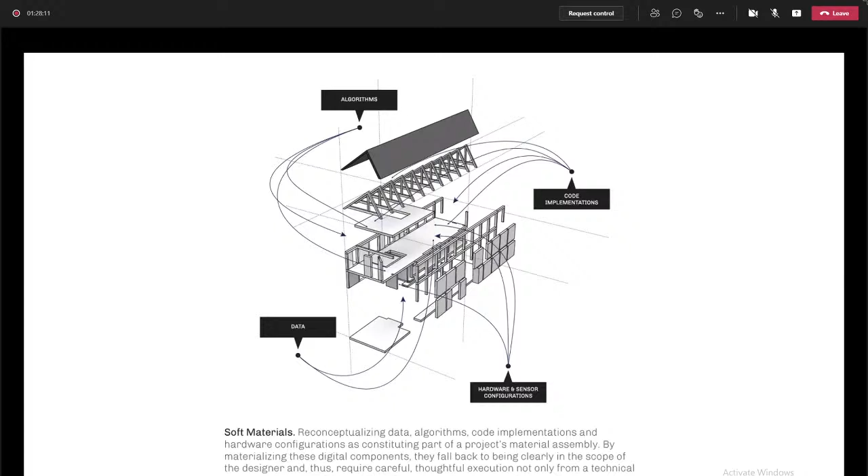And so what does this persistent agency mean for architects' relationship to these embedded computational components? For one, I think it's really important to note that they're no longer design tools, which is often how we think about digital technology within architecture. They're not tools that help with work done while in studio or in a fabrication shop, but rather, more like materials, they directly shape the ongoing impacts, experience, and performance of the project.

So as such, I argue that these software embedded elements, such as data, algorithms, code implementations, should not be decoupled through a perceived immateriality from a project's physical dimension. And instead, they should be thought of as soft materials, which is a term I use to describe and foreground these things, such as data, algorithms, and code implementations, as materials in and of themselves, and thus explicitly constituting part of the project's material assembly.

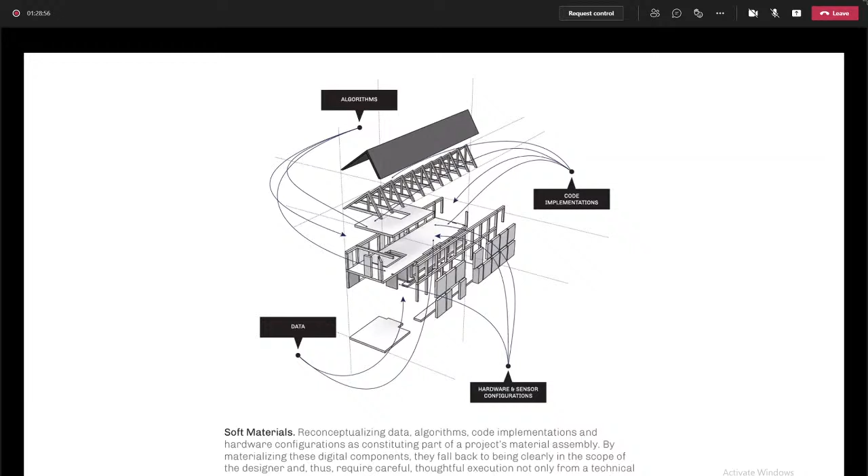I'm sorry, those are my kids, I'm sorry for that.

What I'm trying to get at is there's a material-oriented perspective of digital media that operates in worlds of media theory and science and technology studies and things like that, that really reinforces the idea of this soft material reconceptualization. And so these three texts, quite recently published, all help support that, and I'll just quickly talk a little bit about them.

So The Stuff of Bits by Paul Dourish is really exciting because it focuses on expanding our conception of digital media into assemblages of hardware, software, data representation, spatial practices, computer languages, and other related items. And so Dourish is really fascinated with how formats and representation constrain, enable, limit, and shape the ways we can engage and use media, digital media specifically. So an example would be, think about how different your architecture project would look if you designed it in Excel rather than AutoCAD. So the format of the tool shapes the outcome.

The second one, All Data Are Local, by Yanni Loukissas, is also pretty interesting, where he calls for new models of very explicitly local practice with data as a way to form close relationships with not only data, but also the conditions in which the data are manifest. So he's really actively trying to connect data to place. He recognizes that data are cultural artifacts affected by numerous factors, including the people that create them, the time and place they were created, the audience which they were created for, and the instruments and machines used to create them and consume them.

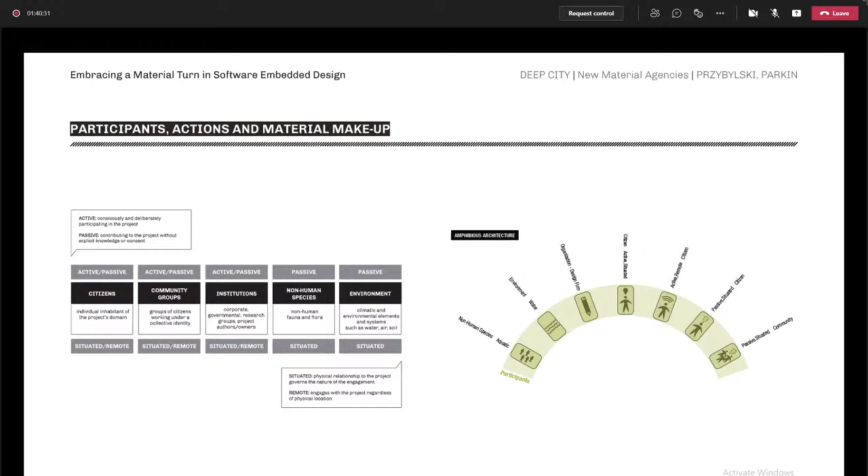You'll notice in the slide on the left side non-human actors, including the fish, all the way through a whole bunch of human actors, including the designers. The water becomes an actor. The emphasis is to really be inclusive of who's considered as being impacted as a stakeholder in the project.

So moving along, of course, these actors do things. The framework organizes 9 types of actions along a get-set spectrum. The get actions deal with the lower level interactions, so use cases and scenarios primarily defined by accessing or retrieving project amenities. Looking at the lights to get some information is an example of that. And set actions see participants assign and manipulate project states, so that's a much more empowered state of participation.

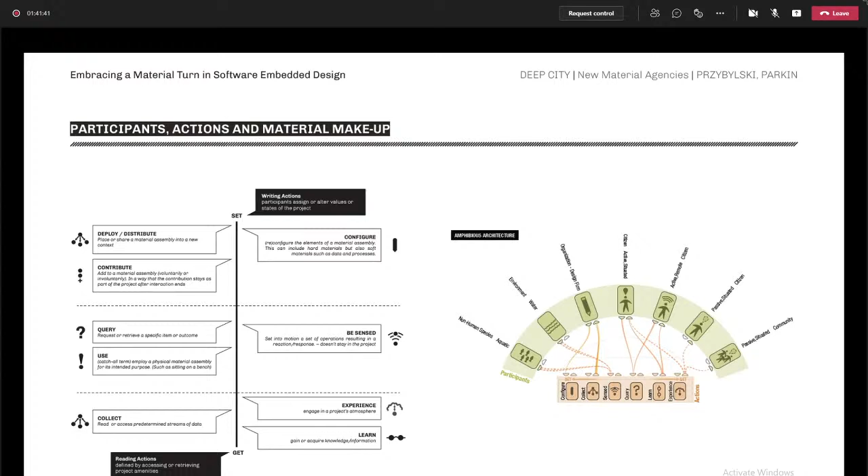And as you see this diagram unfolding on the right-hand side, we expand the diagram for that project by enumerating available actions and linking them to appropriate participants. So the fish can be sensed. That's pretty much all they can do. But an active situated citizen can interact with a few different details that I didn't go into, like they can text the fish if they wanted to, which creates a response in the light.

And so the end of the first stage is concluded with this addition of a material makeup, which is the lower arc of this drawing, where we start to, for all these projects that we're studying, really enumerate the material composition and organize it into three categories. So soft materials: data streams, databases, algorithms, and code implementations, things like that. At the other end, there's hard materials, so all the physical materials that we're typically thinking about in projects.

And then in the middle, there's something we call SED-ware, or software embedded design ware. These are physical elements that are directly supporting soft materials and often acting as links between the real and virtual worlds, including items such as sensors, actuators, microcontrollers, and conduits. Even just this act of enumerating these things that often get black boxed in these architectural implementations of software embedded design is a big step. But then we also start to trace them and connect them and really show their agency in the impact of the project as it relates to the spectrum of actions that are available.

There's a second part to it, that is a bit newer still, but it's starting to assess what we find in that first part, and it leverages that information into a reflection on starting to project wide-ranging values and outcomes, both planned and unplanned, that we want to bring into the focus. And so we want to engage these projects in terms of rights and security, participation and experience, equity and access. And we do an analysis on where we think the projects are strong or increasing in their capacity, and where these projects are maybe taking things away from the family of actors.

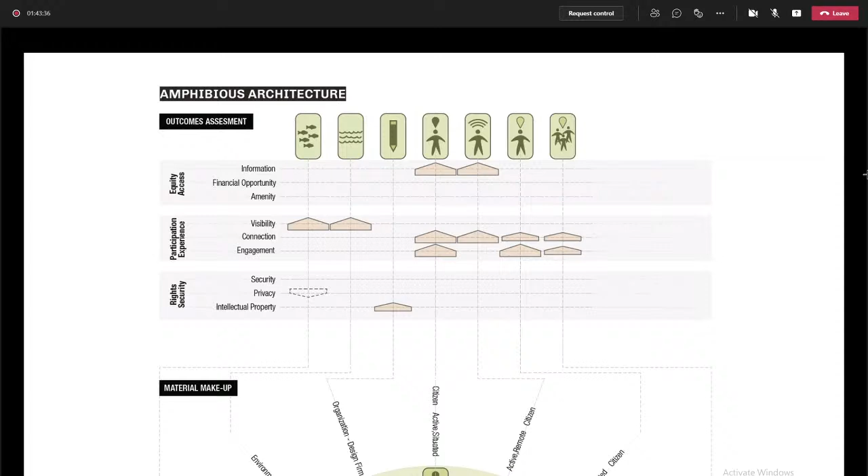And so I know that's a lot to take in, but this is the takeaway. The framework doesn't allow you to just study one project, but because of the standardized framework-like approach, you're enabled to read across projects. And very quickly through the visualization strategies and the organization, you can really read different degrees of agencies of material entanglements, as we like to call them, and the outcomes that the project makes. So there's a power to thinking about and normalizing the analysis in this way.

And so zooming this back out a little bit and maybe offering a way to get back into it during the discussion, I really see these software embedded design projects as actively moving from test beds, which is where they have been. And of course, with the impetus of 5G and smart city moves and all that stuff, these things are rapidly pushing out to be real world deployments. And so we need to support engagements that maintain a connection to the complex urban condition in which these projects operate, and not be blinded by their tech focusedness.

And I think the materialist account of embedding computational components can really serve as a way to complement the performance-oriented engagements with software embedded design that are often very important and unfortunately, in my opinion, dominate the way we talk about them. This approach exposes an alternative, harder to measure perspective centered on social and ethical impacts and outcomes. So that's the intent of the project, to really just offer a different lens to explore this work in parallel to the ones that are already being celebrated and published in traditional architectural avenues. So I think I'll stop there.

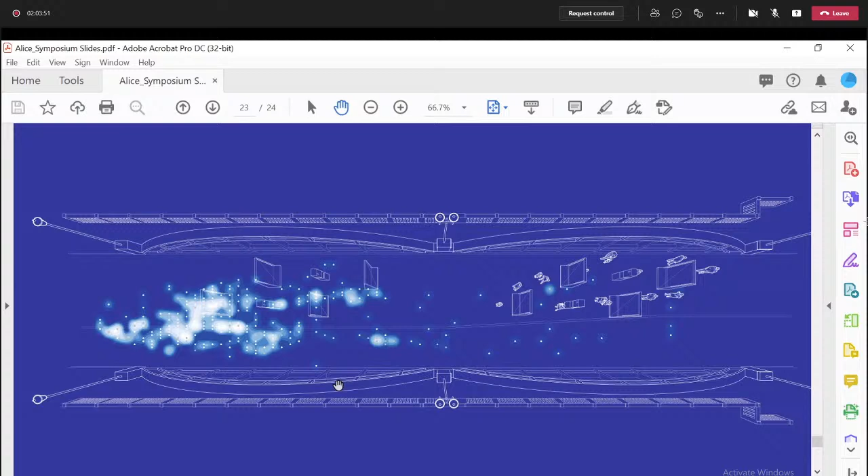So this is a still. I was also able to get a real-time kind of loading of this kind of information as well. So this was just a flattened version with all the time collapsed together. But you can imagine how this can also apply as sequential in doing a project like this.

And yeah, that's it. Thank you. So these were some of the things how I apply and work with Python. I had a chance to work with Python in a certain way for thesis and for some of the things I was interested in.

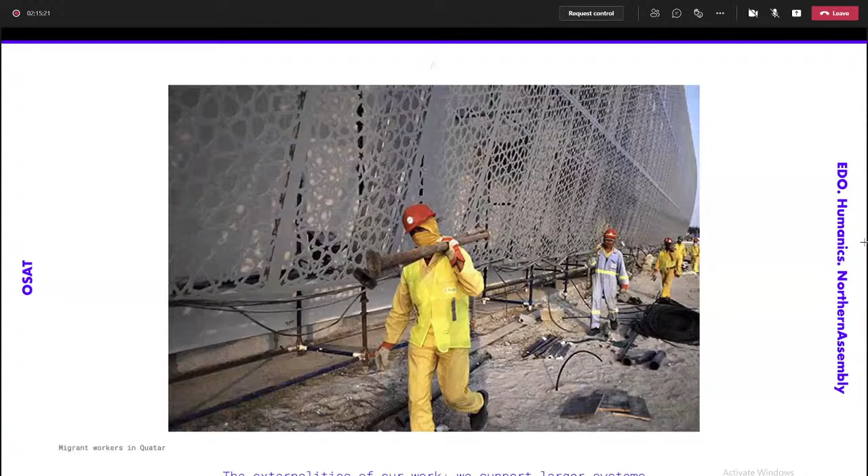And I think this is a question that you can also ask about the geometry, the form, the tools you use to produce buildings. And one particular area that may be of interest to this group is the externalities that come out of complexity. So here you have migrant workers in Qatar putting together a complex building under horrible social pressures.

There's lots of things you can look up around the Zaha Hadid buildings or the kind of labor disputes for these migrant workers, if you're interested in this. And I think what's important is to question how our reasons for form produce these social conditions and how we might question those and find better options.

And I think, if there's one thing that we have to be critical of, it's complexity for complexity's sake. I think this is something that we see a lot of, and I don't want to seem like I'm ultimately a pessimist, but I think there's room to also question technology, as I've said. What externalities does this knowledge, this obsession with complexity and fabrication imply when we get to buildings?

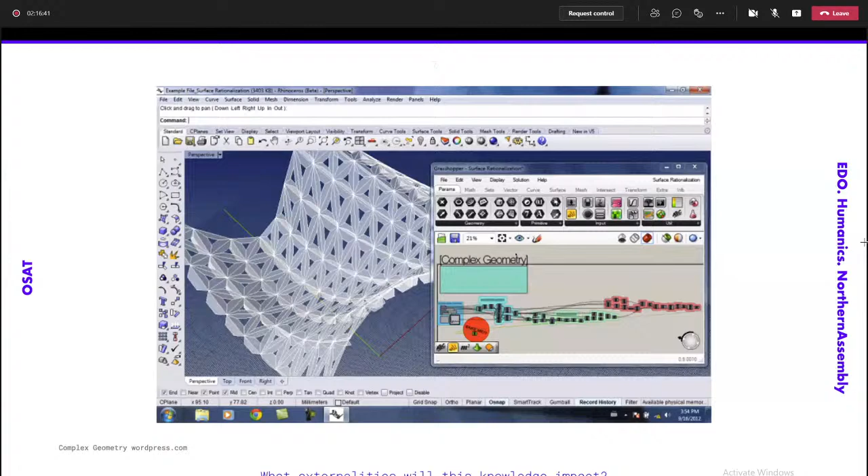And I took out a bunch of slides, but I think this is what you see when you search for parametric architecture. I think this should seem familiar to everybody, that this seems like what form is about today. And I kind of want to make a case for actually a more complex form that doesn't look complex. So this all looks complex, but as we know, it's relatively easy to generate digitally, and it's relatively hard to make physically. So I kind of want to talk about those forces.

I will also note that I've been in this business. I'm complicit in the formal complexity world. I worked at Front. I was part of the formal rationalizing industrial complex. So there's this whole world of companies that have been generated to figure out how to build architects' crazy forms in reality. And I worked for one of those, and that's a great place to learn maybe what the pros and cons are.

And I guess what I come out wondering is, why aren't we searching more for the simplest desirable solutions? We're often looking for the most complex solutions or the coolest or the most novel, but who's building the simplest desirable solutions? And this is an important framework for me: to always think about desirability and feasibility. If there's one thing that you could apply to your own work, it's: I've got an idea, where does it sit in terms of desirability and feasibility?

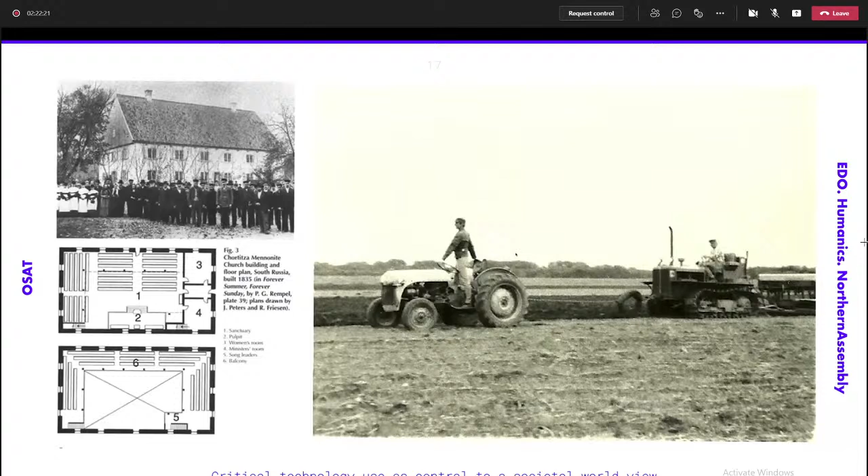And I think that this is an important question, not just for me, but today for all of us. If you've seen The Social Dilemma on Netflix, or you've seen how technologies are starting to influence social networks, it's really important to think about what our position is on this. So I would say generally, if there's an enemy, it's to have form first, and I think that's where there's a critique for some of these complexity projects.

I would say that appropriate geometries employ computing paradigms that are problem and context led. So they start with a problem, they start with a context, and that is largely a human thing. It's not necessarily a technology. So their complexity lies in the ability to manage, control, and arrange found geometries. And anyone that's tried to engage with this problem will know that that's actually very hard and very complex. So I think we should be really impressed with projects that actually manage to deal with found geometry.

So I want to run quickly in the remaining 7 minutes through a few paradigms. I maybe will introduce the beginning few slides and then click through them so I can get you through 3 paradigms that I see as a bird's eye view of appropriate geometry. So computing paradigms and tools. I see geometry as a tool. Tools that could support OSAT work.

So the first is where I started. This is my grad school thesis, where I was critical. I started critical, and I said, why are we obsessed with making non-standard? If you research the non-standard movement, there was this movement looking at continuous differentiation and non-standard production, and how we could use digital tools to make complex objects. So forms that were complex and gooey and different every time without the cost of that, because we can use CNC machines, for instance. But my question was, why are we doing this?

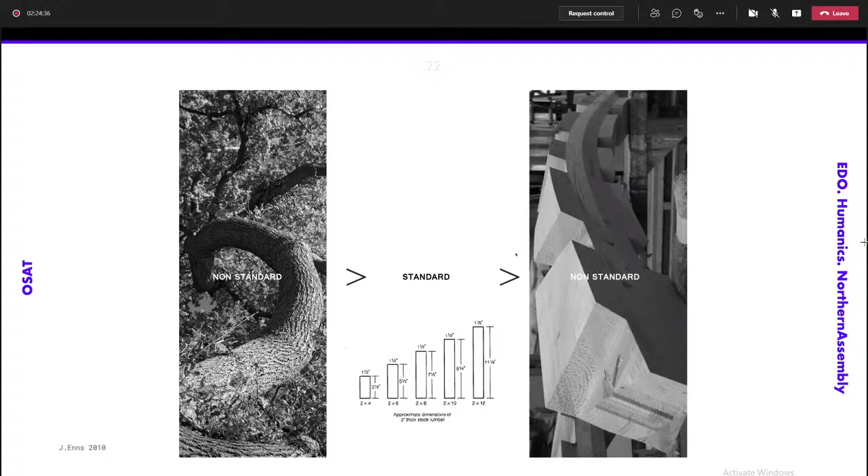Why are we moving these beautiful structures like non-standard trees into standardized materials? What do you make those non-standard things out of? You make them out of standardized MDF. We're building these very illogical material flows. So standardized objects into non-standard shapes. How could we go straight from non-standard stuff to non-standard forms without that inefficient process chain between it?

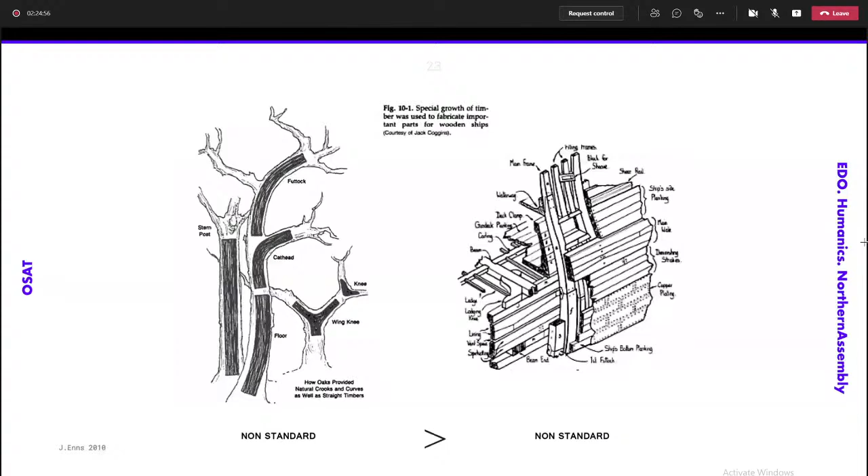So this is an old way of building. This is a low technology way where the Vikings would head out into the forest, find the tree that looked most like the bough they were looking for, and use it. So my project was to understand found geometry. I headed out into the field and scanned 10 trees, came up with 83 joints. This used photogrammetry at the time, but I'll show you some projects that spun off from this. So this was our joint catalog. Yes, it's digital on the right, but again, I didn't really care; this was a tool to get us there.

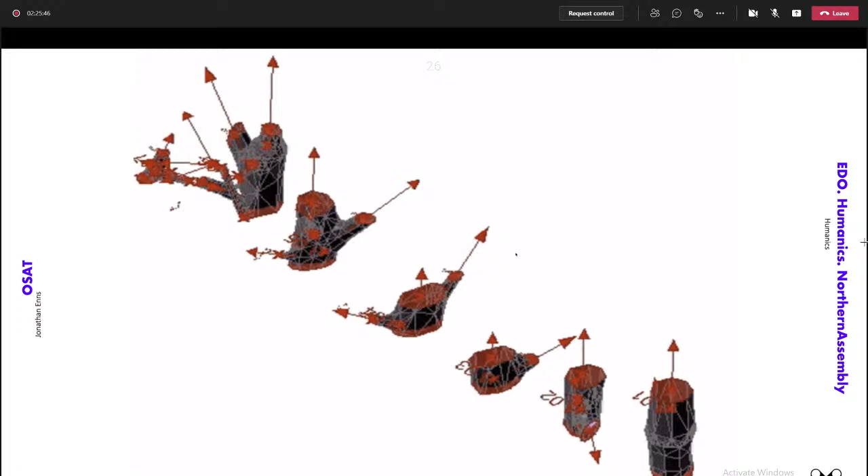This was a video that's not working, but I built a rig in Grasshopper. This was 2010, so I'm a little rusty, but in 2010, I was getting the angles and the vectors from all of the found nodes, and then using some goals to build structures from those nodes and applying structural goals to these. And in the end, it produced a building whose structure or frame was generated from the found geometries on the site. It was a formal project, yes.

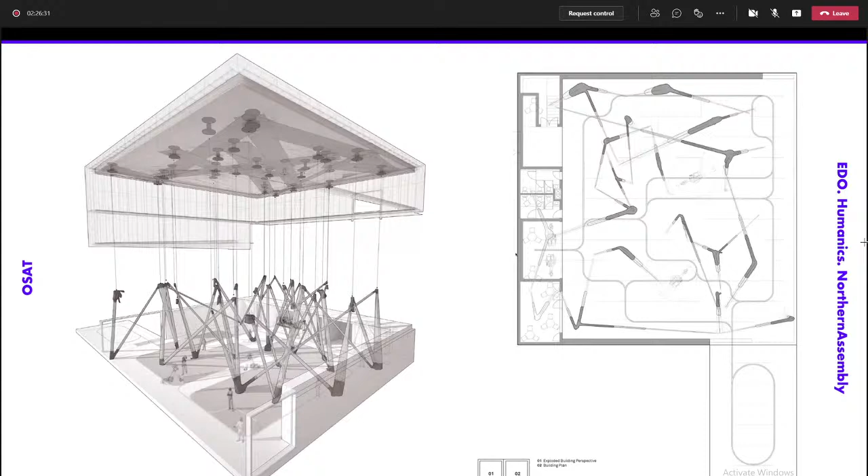And I think what stuck with me from 2008 is the philosophy more than the formal focus, the philosophy on using found geometry. And the challenge in this project was really manipulating and controlling those geometries. Many parts of the project were cited, intentionally or not, by the AA Woodchip Barn project. They actually have a few of my slides in their presentation, but these guys funded a project in 2015 to do a very similar thing where they scanned trees, manipulated them with CNC machines, and were again trying to use this natural complex material to actually get things they wanted from it.

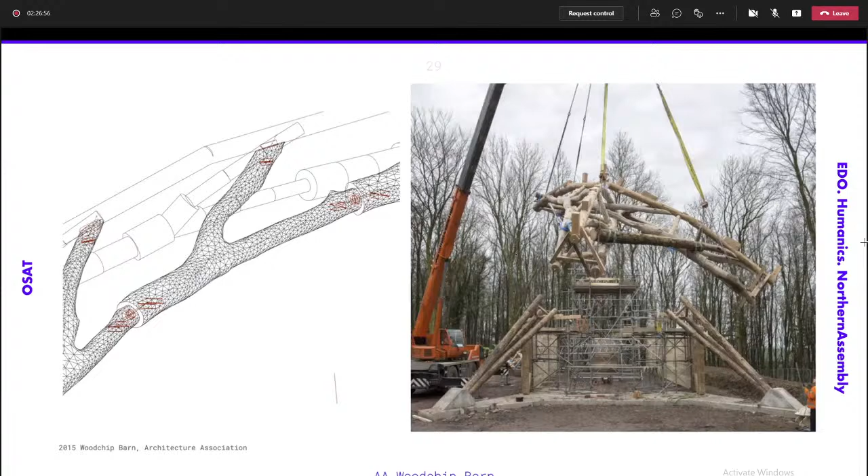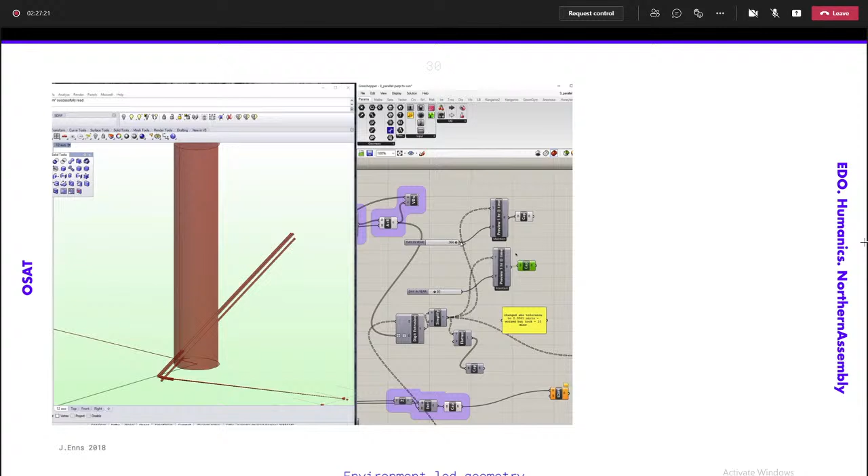I think this was an old project, and Chris mentioned maybe wanting to see it. I want to show you the guts of the project a little bit. This was a project where rather than using found material, I used something very accessible to everyone, which was just sun angles. And again, it wasn't form first. The question for me was, how could the form of an object emerge from existing data in the field?

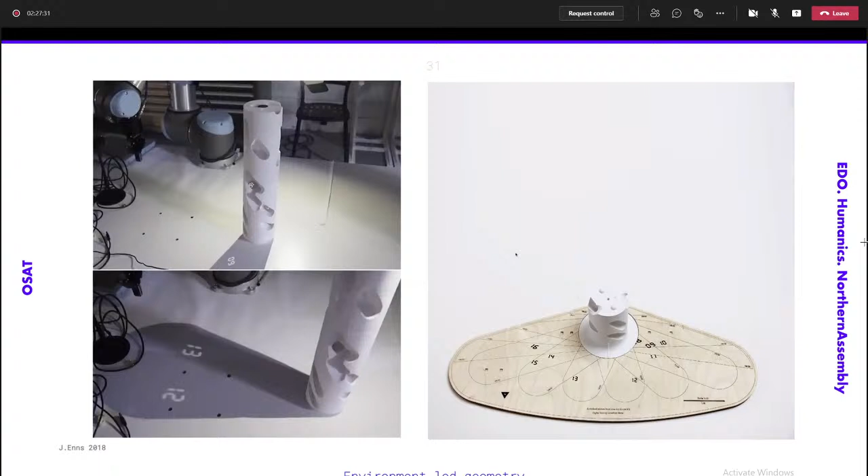So I'll just go ahead and we can come back to it later. But this was a clock, and the complexity of the clock was produced by these Swiss cheese holes that were intersecting and really produced by sun angles. And my goal was actually to be as neutral as possible, to not try to make anything crazy at all. It was to let the channels do their thing. And so this thing tells time as the sun swings through the sky. It projects the time of day on the ground.

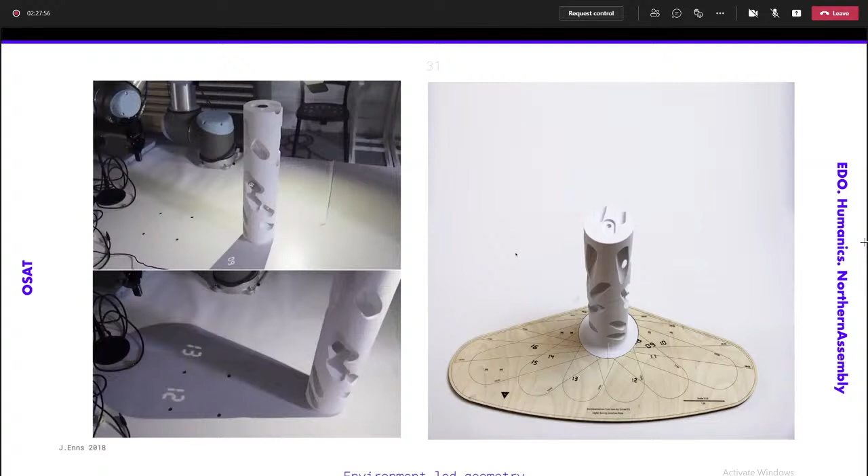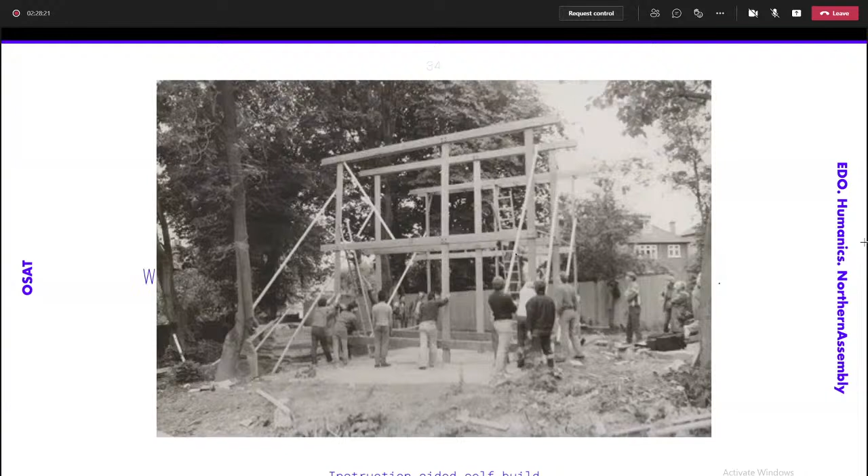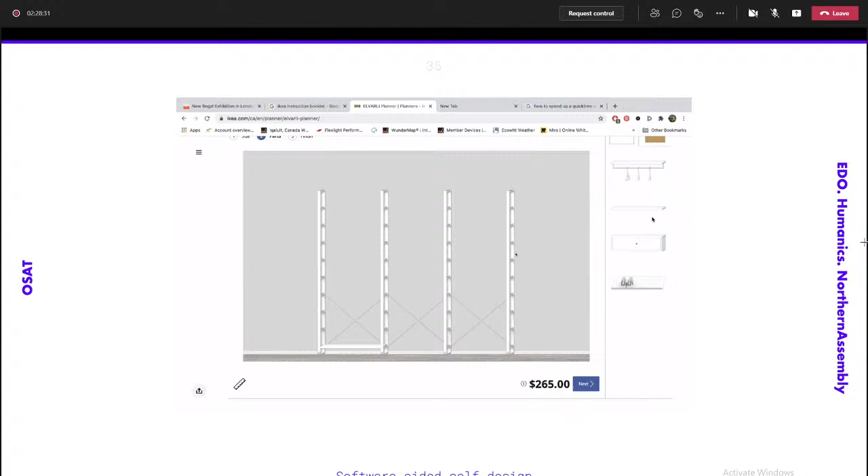So if that paradigm was found form, found objects, bottom up, I think another paradigm is to think of human-led, so to think of the form as emerging from people. And I think you have some peers that have all contributed to this. There's self-build. There's also self-design. I think IKEA does it really well. And in computing paradigms, I think this is a really interesting area to be, to challenge IKEA at the scale of architecture, to let people use platforms to assemble their own architecture.

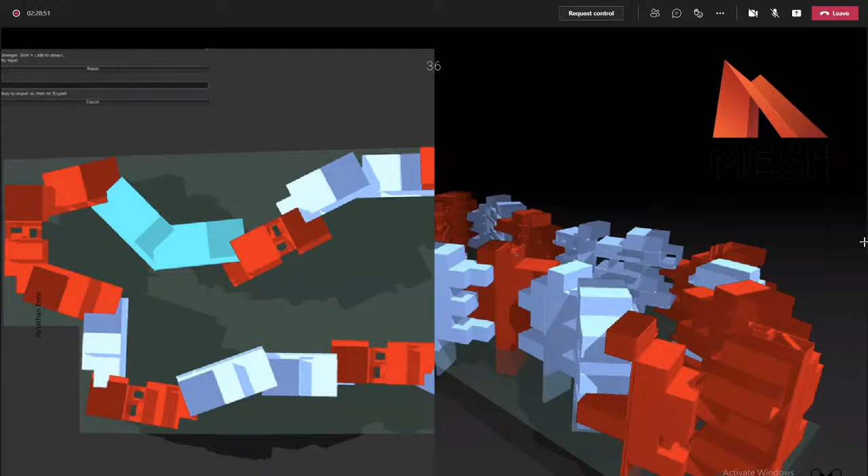Shout out to a few thesis students out there. I've been building these systems for years. This was work with Dan Hambleton from Mesh Consulting on a user configured housing block that also had a tangible user interface. So a little model, this was the digital version where planners actually could assemble the location of towers in a block.

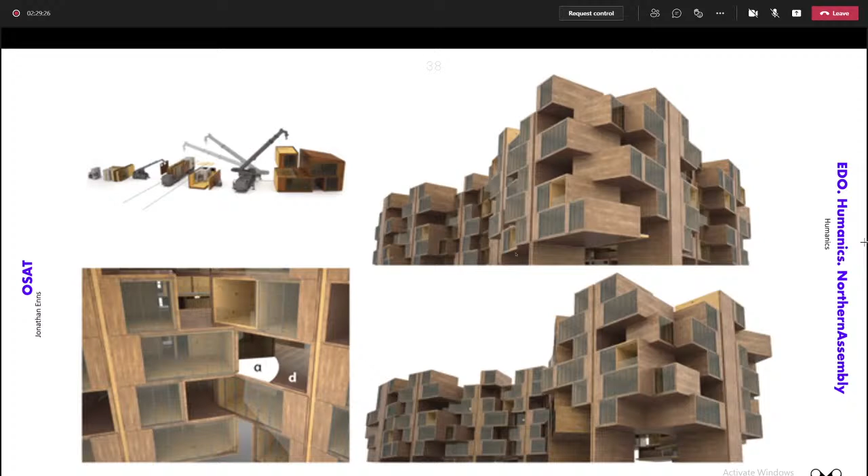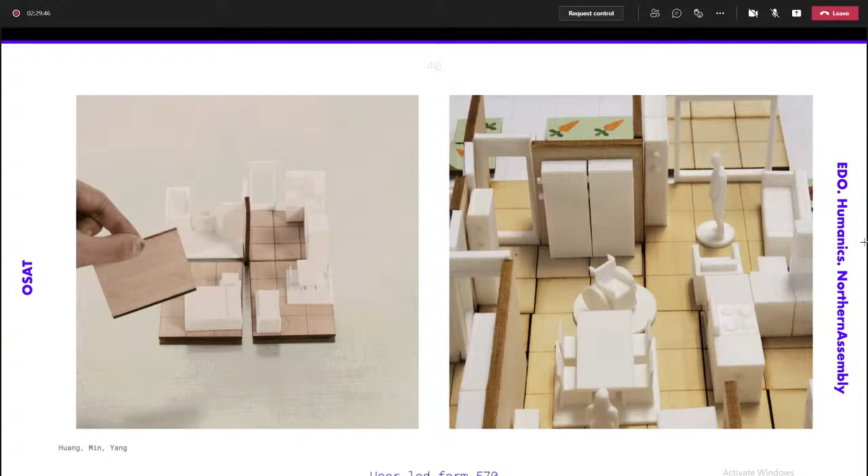And there was a fusion between the structural rationale of the design and the tool. You needed the structural rationale that this cross-lam enabled, these overhangs, for the tool to work, and you needed the tool to work to get the benefit out of all the extra structure we put into the building. So there's user generation. ARC 570, which some of you were in, was the same thought of how to build convivial tools, tools that end users could generate themselves, as much for research in this case as literal design. But you could make the jump to figure out how this could actually be a literal design configurator.

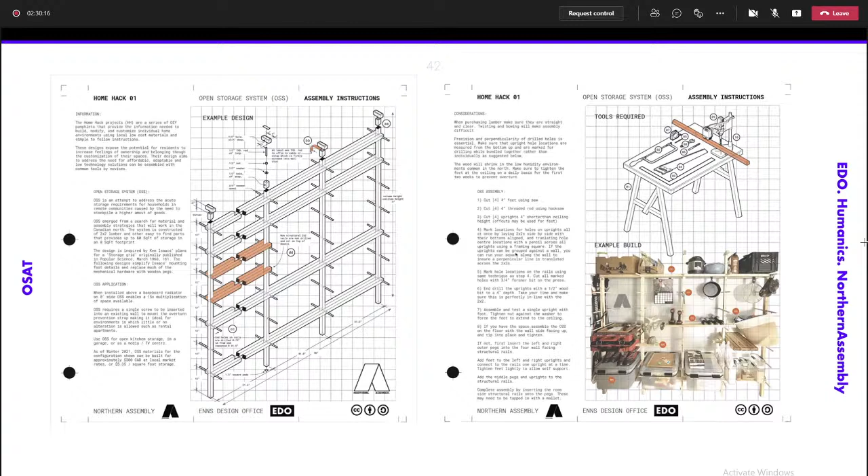And I'm going right down to basics. My system is Facebook and engaging the community and publishing instruction manuals like a Ken Isaacs from the 70s. Check them out. And trying to figure out how geometry can be as simple as possible. I think I'm going to skip through a few more just to show you the end idea here.

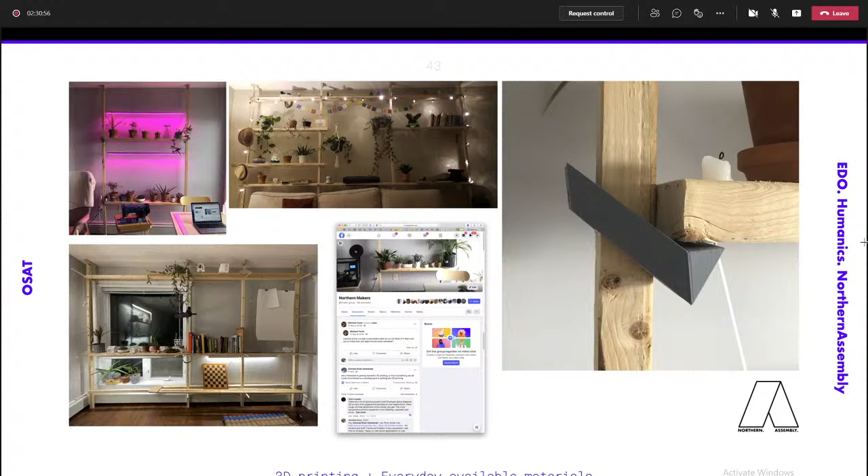I'll say a few things in terms of paradigms. I think we should make our digital world behave more like the physical world, not the other way around. So I don't think we should be figuring out how to make our physical world emerge from our digital fantasies. I think we should be embedding the physics of the physical world into our technology.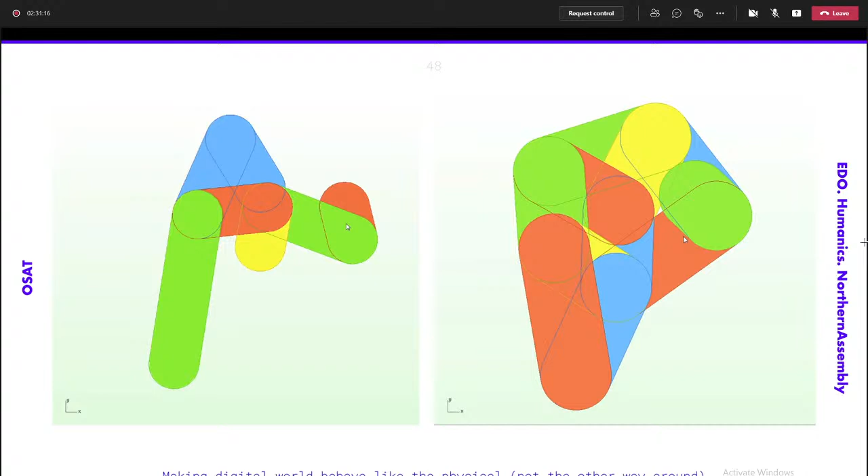Karam, our esteemed colleague and one of my thesis students, was an example of this with his thesis on embedding wayfinding and perception into Unity-based wayfinding. Amazing work. And I think this is the theme: embed more knowledge into our digital models. And I think the end fantasy on the Northern Assembly stuff, the stuff I'm doing up here, is actually to start getting into kinematics.

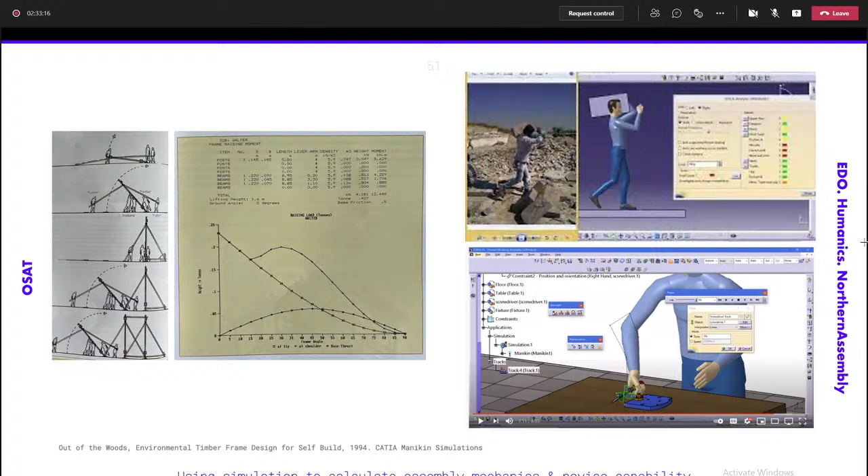So I think that's it for me. If anything, I think appropriate geometries employ computing paradigms that are problem and context led. The complexity lies in the ability to manage, control, and arrange found geometries. And so we're going problem versus product led. So thanks. That's what I've been looking at, and this is what I've been excited to work on with a bunch of you guys. So that's it. Thank you.

Thank you so much for your wonderful presentation, Jonathan. I think we'll open up to any of the audience members if they have questions. Please unmute yourself and speak out. Simon, is your hand still up from last question, or do you have a question for Jonathan? I didn't know, but thanks, Jonathan. Hi, it's good to see you. It's okay. It happens to the best of us.

Yeah, I don't know if I actually had it up, but I don't think I've ever gotten a full view of the scope of your work like this. If I have a question, it would be where do you sit today with computational design tools like Grasshopper, or algorithmic design tools? I know you talked about Facebook, which I think is a cool way to address what you're after, but do you still engage with Grasshopper or similar tools like that?

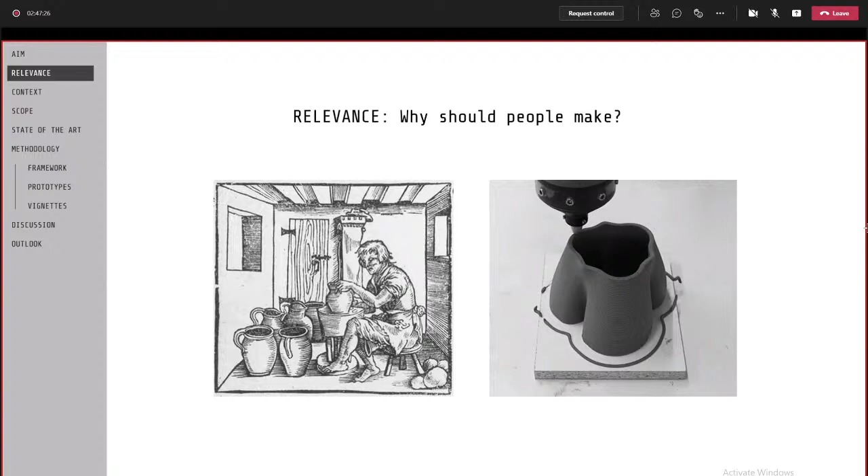Making for yourself or for people local to you is an important part of the human experience. However, small-scale making has lost its necessity and much of its importance today. There are still many of the personal and interpersonal benefits to making that we can take advantage of. So I'll give a few examples where empowering people to create with digital fabrication tools has a positive impact on personal and community. So for example, the IKEA ThisAbles projects are a series of hacks that make their furniture more accessible for people with disabilities. Mass producing these would not be feasible for adapting to every user's needs.

And Studio Bark shared their designs with the protest group Extinction Rebellion, which is a modular box that can be fabricated with a CNC machine and during a protest can be assembled to occupy a space. Another great example of empowering a group in a way that would be difficult to do otherwise.

For some larger contexts, it's important to understand the industrial revolutions. It's typically categorized in terms of four different ones, but the first three are sort of improvements on the idea of mass production and vertically integrating systems. The important disruption in Industry 4.0 is not only mass customization using digital fabrication tools, but an unprecedented exchange of information. So both of these qualities lend itself to the possibility of successfully decentralizing fabrication.

The impact of economy of scale is becoming smaller and smaller in this Industry 4.0. So in terms of economy and culture, having a collaborative model rather than a capitalist model for fabrication is simply more democratic and empowering. Distributing manufacturing also distributes power. By introducing new people to digital fabrication, we're also introducing them to these collaborative values.

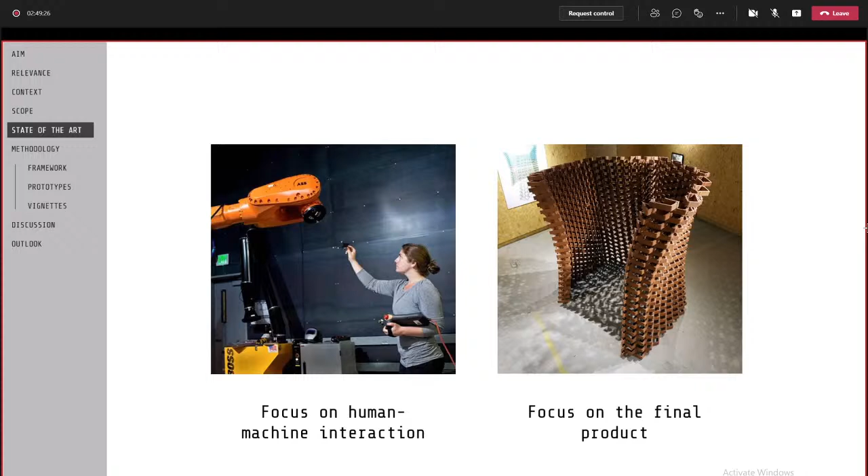So I'll slow down on this quote because I think it really frames the problem and the context really nicely. This is Adam Greenfield's book, Radical Technologies. And he says, the challenge isn't at all to propose the deployment of new fabrication technologies, but to deploy them in modes, configurations, and assemblages that might effectively resist capture by existing logics of accumulation and exploitation, and bind them into processes that are generative of a lasting and significant shared value.

Those interested in seeing digital fabrication used as a part of a project of radical transformation will need to invest a great deal of effort into ensuring that the way in which one would go about using it is actively invitational and not merely demystified and formally accessible.

So I made a simple framework that would lead my prototypes, of the basic elements that I think would go into forming this ecosystem. So I'll go through them. The user's at the center, of course. The space: making, storing, collaborating. The materials: the raw matter, parts, components, assemblies, and so on. The physical tools, this can be pretty broad: the device that carries out a particular function like modifying the material.

Design tools, used to plan the qualities, function, and assembly process of a finished product, usually digital, but can be analog. Systems, the groups of items which are organized in a way that helps the user reach their goal. And the information: skills and understanding of the subject that's transferred through books, devices, or digitally. And then the interface, which I see as sort of a layer that connects all these together.

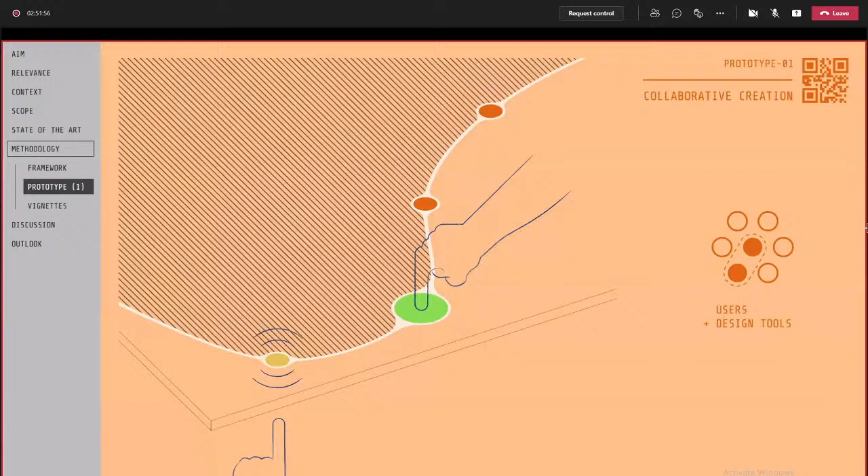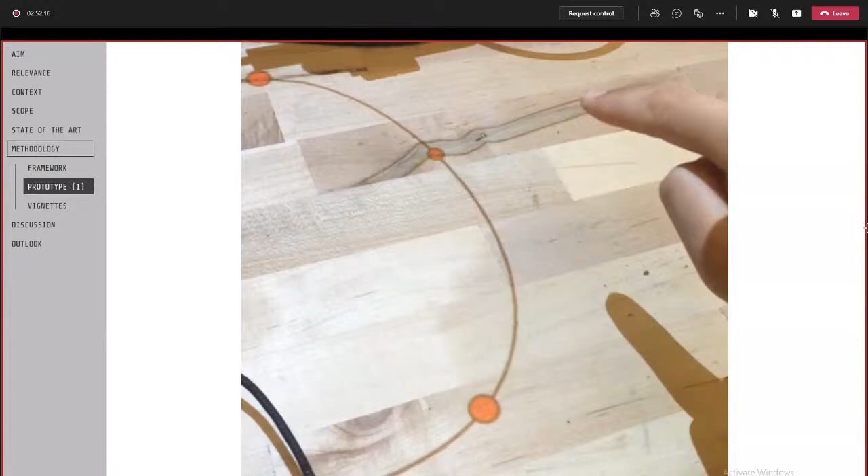So prototype 1: how can we engage multiple people into the digital design process? My first prototype, collaborative creation, aims to do this using a reactive tactile projection at full scale onto the working material. Does this play? Yeah. So the outline of the design is projected along with control points that react to nearby users' fingers and are activated once contact with material is made. This is done using script, projector, and hand tracker.

So looking into the future, the next step for this prototype would be actually incorporating it into digital fabrication tools such as a CNC machine, and adding some restrictions to the design based on the limitations of the tool. And when done away from mouse and screen, collaborating and exchanging ideas is much easier and more democratic.

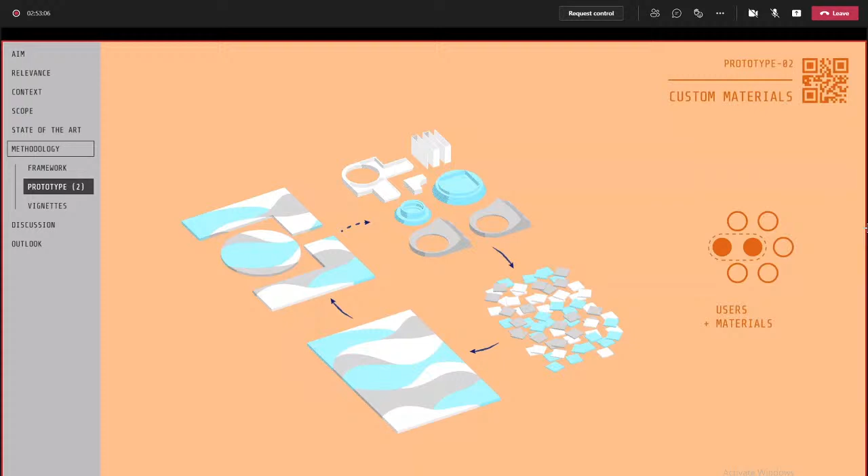Prototype 2: how can we involve people in the creation of their own raw materials? So the next experiment I did was creating raw material from the waste plastic from 3D printing, inspired by the Precious Plastics project. The aim is to allow people to be involved in a part of the fabrication process that's usually inaccessible and taken for granted.

So I took my own waste products, got more from the local Cambridge makerspace, which otherwise would have been sent to the landfill, shredded them, mixed the desired amounts, heated, and pressed it and let it cool. So the final raw materials are now ready to be carved, laser cut, heated again, and bent into a new useful product.

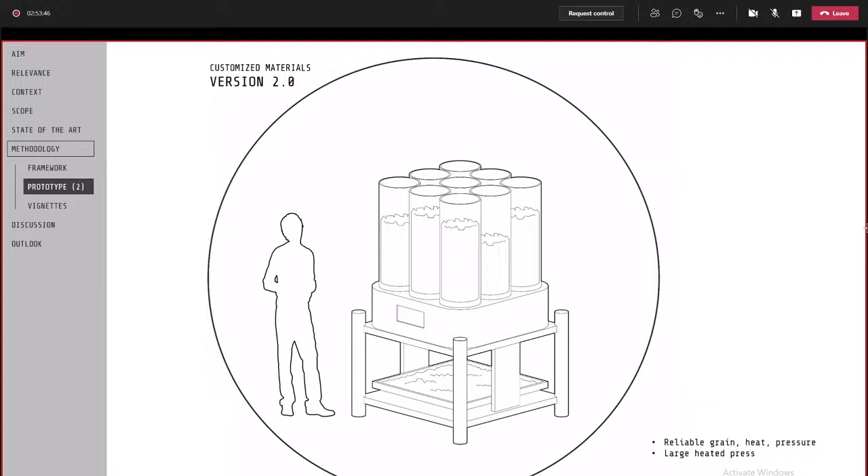Through these experimentations, I saw that different colors, grains of shredding, heat, time, and pressure are all factors that affect the quality of the final material. So again, the future version would be fine-tuning the process of changing all the variables to make output reliable and consistent. So hopefully this prototype adds a new layer of customizability and gives the users a better appreciation of material life cycles.

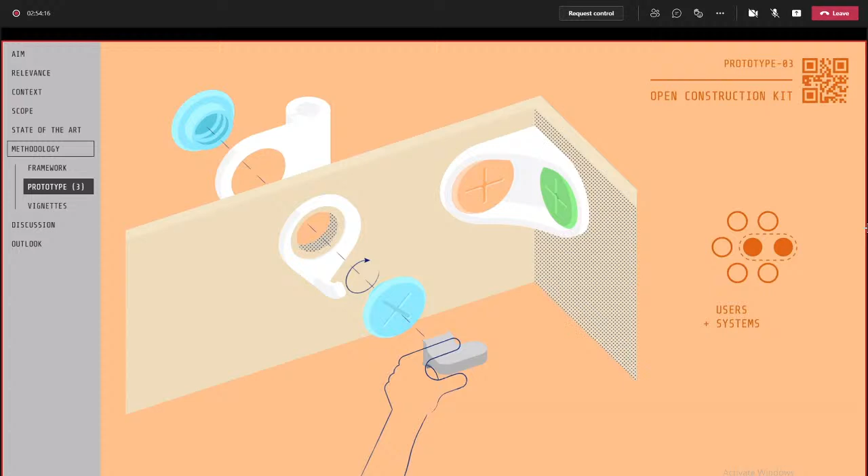Third prototype: can an open source expandable kit of hardware make people excited to create and share? So the Open Construction Kit is a reusable set of 3D printed hardware that's designed to attach to scrap material with minimal tooling. All that's required to install this is a drill with a hole cutter. Even the tool that tightens the screws can also be printed.

I use the system of parts to modify my workspace to suit my needs. And any user could do the same for their own, and they would all look completely different. You can see a scrap piece of plywood with a weird shape is an offcut from a separate installation. Of course, there's no way to anticipate every user's needs, so they're encouraged to develop and share their own designs and modifications. Not only is this a straightforward way to engage new users into making something larger, but it also encourages making social connections.

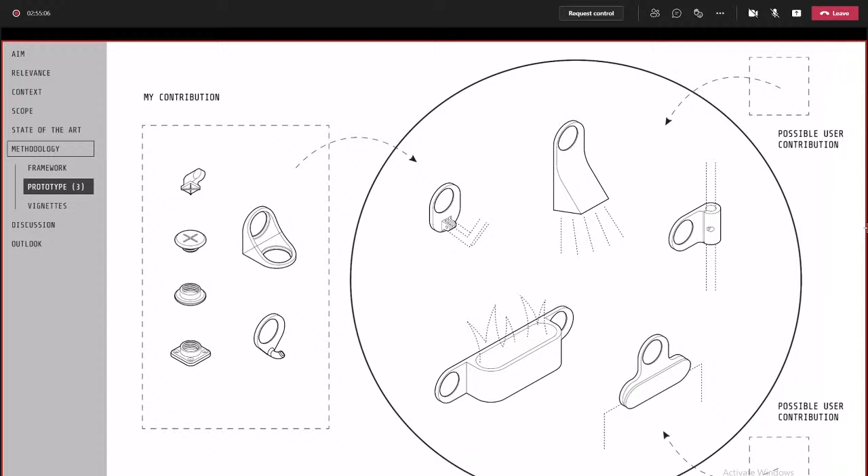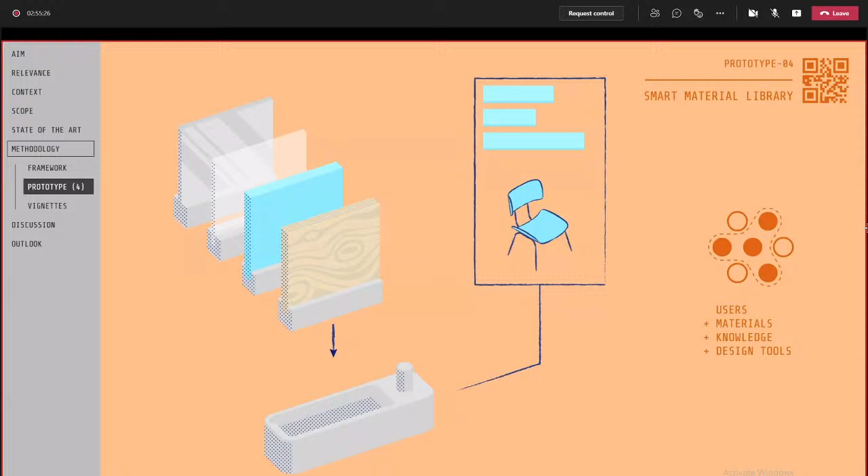Prototype 4: how can we make people gain a better understanding of what impact different materials have on a project? So the Smart Material Library is a device and collection of samples that can not only give relevant information about the materials, but show the information in relation to the user's particular project. When the user chooses the physical sample of the material and places it in the device, it will apply the material properties to their project, render it live, and calculate metrics such as its weight, price, and carbon footprint.

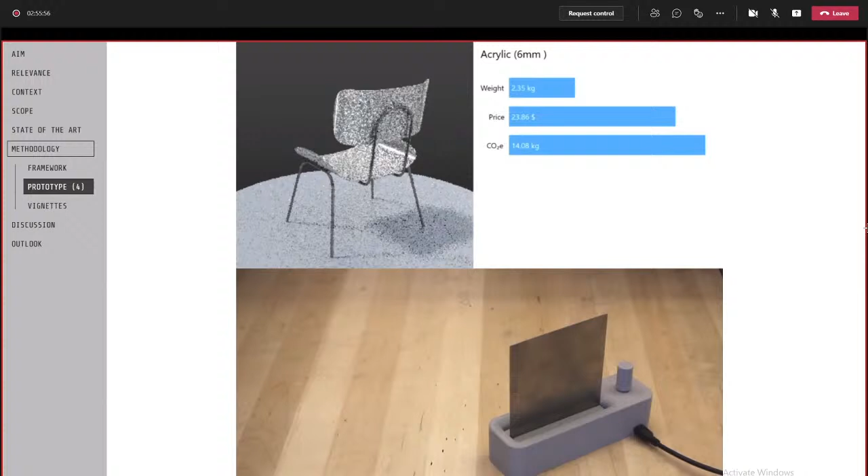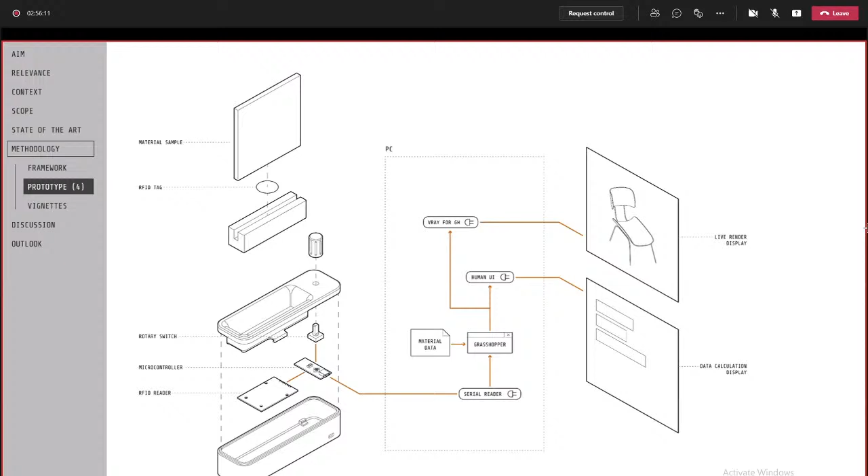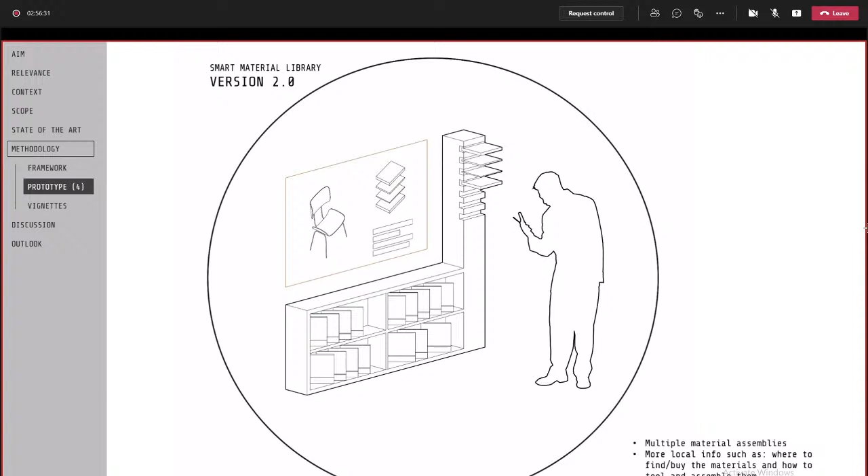In terms of hardware, it uses an RFID tag reading system. It was difficult to find much of the material data in one place online, so I had to compile much of it into a spreadsheet for the program to read. The future version of this would work with assemblies of multiple materials and have information about where to find them and how to tool and assemble them. Hopefully this can be an informative tool, simplify the making process, and encourage even experienced users to experiment with new materials and new strategies.

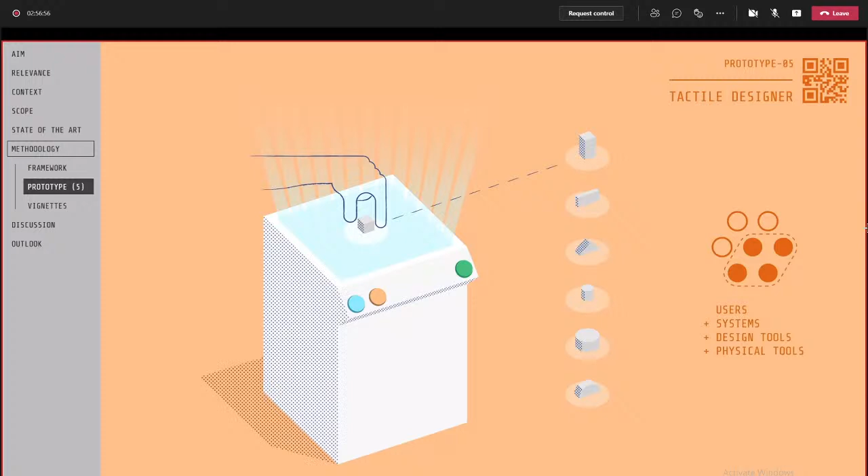Prototype 5: how can a user create and fabricate something unique with no experience in digital modeling or fabrication tools? So the Tactile Designer is an interface tool that does exactly this. Users can choose from a wide variety of pieces, add them in any way they wish, and send it to a 3D printer with the press of a button. The pieces are at the exact scale that they will be when they're printed, and the final product is displayed on a screen as the user builds. When the green button is pressed, the program converts the model into code that's readable by the printer and queues it up to print.

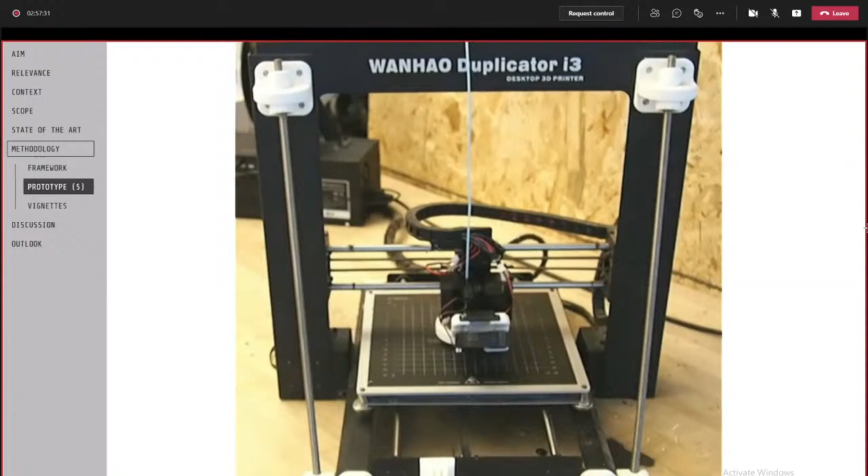So, yeah. And that's a time lapse. And there's the piece.

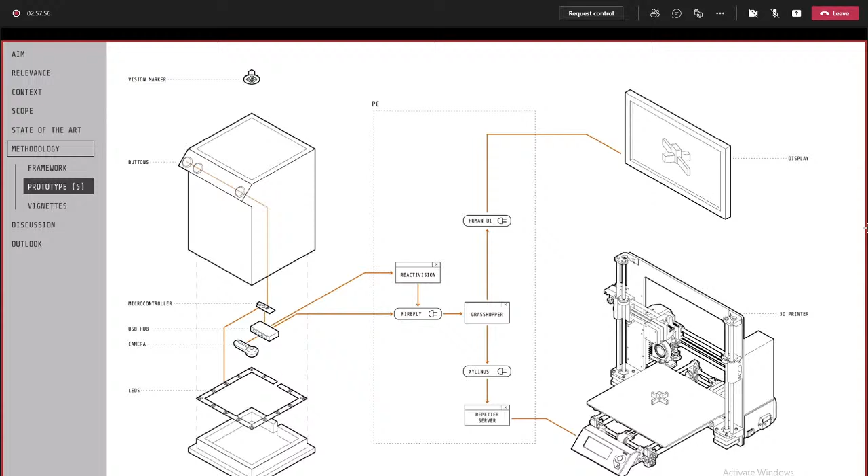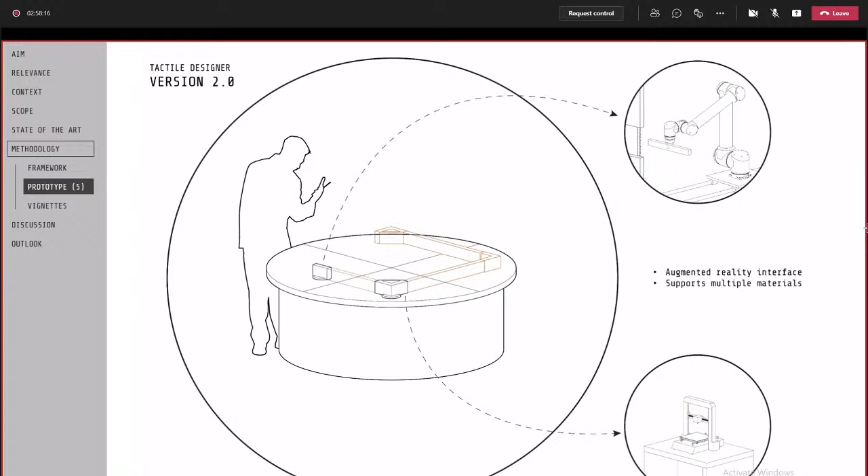The box uses vision-based markers that convey the ID and location. The challenge here was to update the G-code and send it to a local print server with instructions to start it instantly. The prototype shows the users the entire design fabrication workflow in a clear, unintimidating way. A natural extension would be to incorporate augmented reality for the interaction and support multiple materials, which are then sent to their respective production tools.

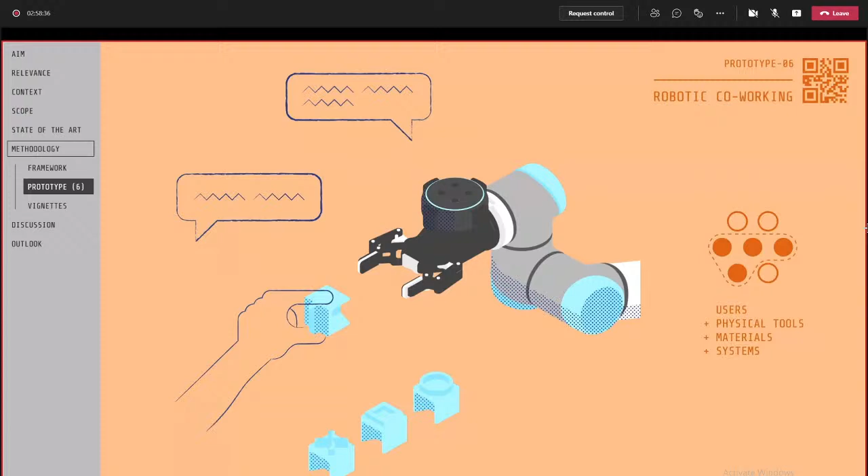Okay, last one, prototype 6. How can a user work with a robot as a coworker to produce something with both robotic and human traits? The primary focus of this prototype was the interaction between the user and the UR robot, and secondly was the product, clay in this test, which is being modified by both the user and the robot.

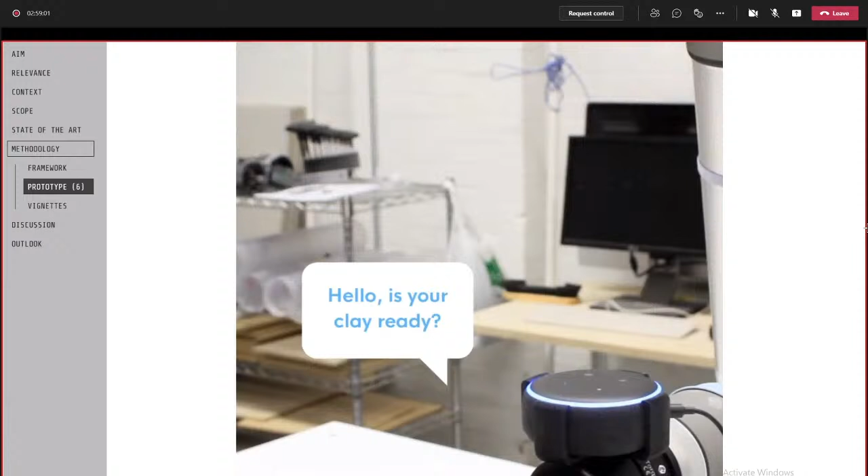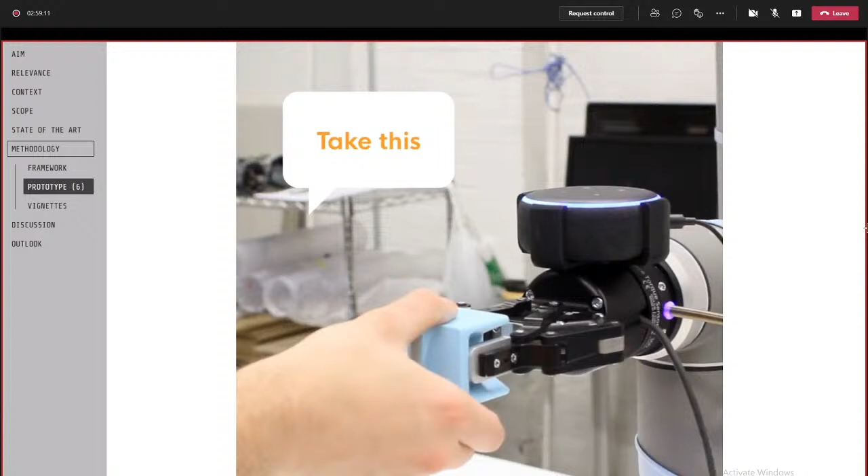First the user molds a piece of clay, and its shape is registered by a webcam with a simple 2D vision system. The robot prompts the user to choose a tooling piece and to hand it over. After checking with the user again, the robot stamps around the perimeter of the clay.

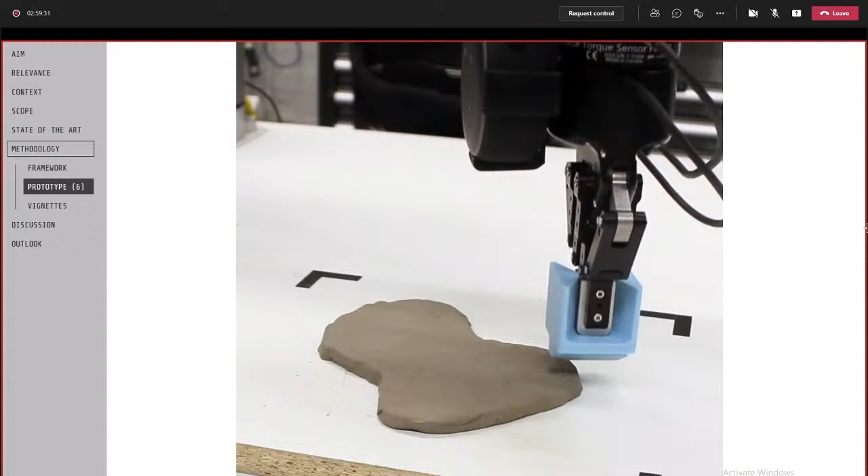Oops, well, you didn't really see the end of that. Yeah.

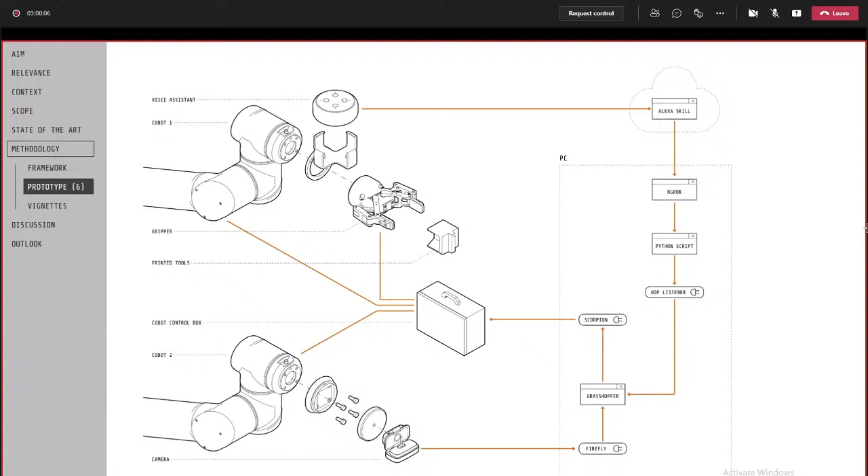The technical and design challenge was to create a dialogue interface which had a simple tree of options. So I used the Alexa developer tools. I could create intents, which is a way for the robot to understand the gist of what the user is saying without needing an exact word input. The next version would involve three-dimensional vision of the material and its surroundings, and more of a back and forth collaboration or even simultaneous workflow, working on the same piece at the same time. By building trust in smarter tools, new users can make full use of all their power and precision.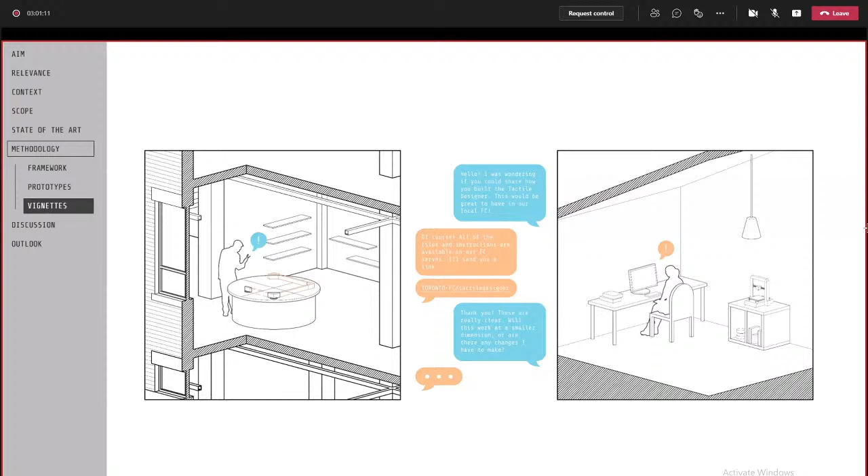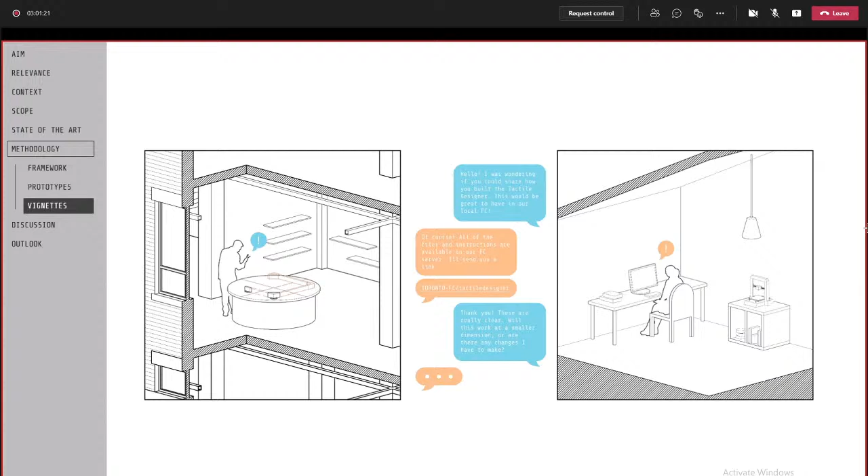This particular one shows two people living in different cities exchanging information about how to build an interface tool, like the ones I had before, to engage more people in their local community. This interaction is based on a real interaction I had with a student in India who was asking about one of my prototypes because he wanted to recreate it.

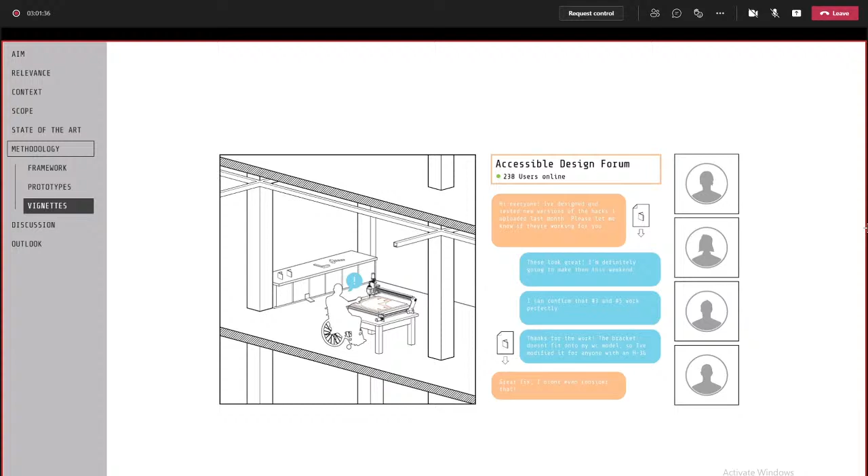So this is an example of a differently abled user sharing the hacks with an online community with similar needs. It shows the exchange and modification of designs by community members. And this example shows a person local to the same Fabrication Commons as a user connecting and commissioning work from them.

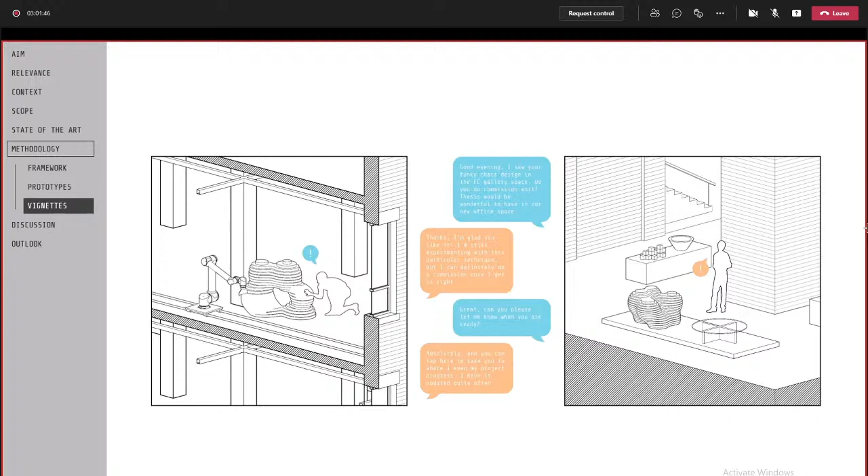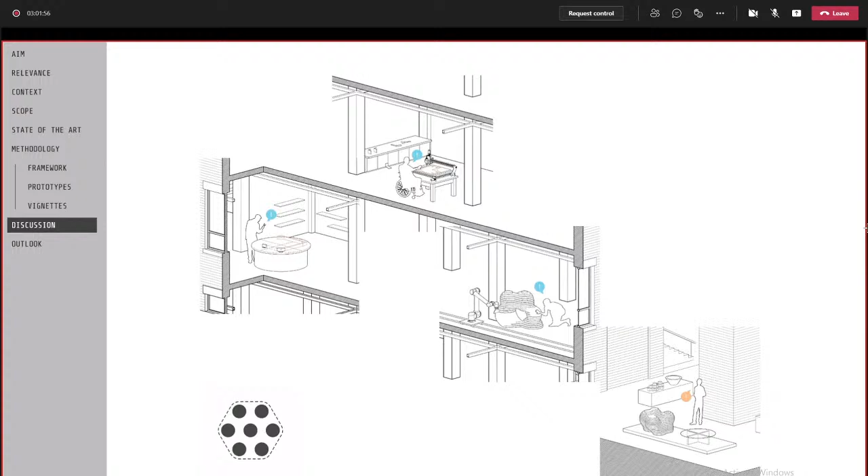So with these vignettes of people making, learning, and interacting, we can start to form an idea of how a community of empowered, connected creators would look like. Of course, we have to start small to reach that point. So yeah, that's the thesis I completed a year ago, but I've carried through these collaborative and maker values with me. So yeah, thanks for listening.